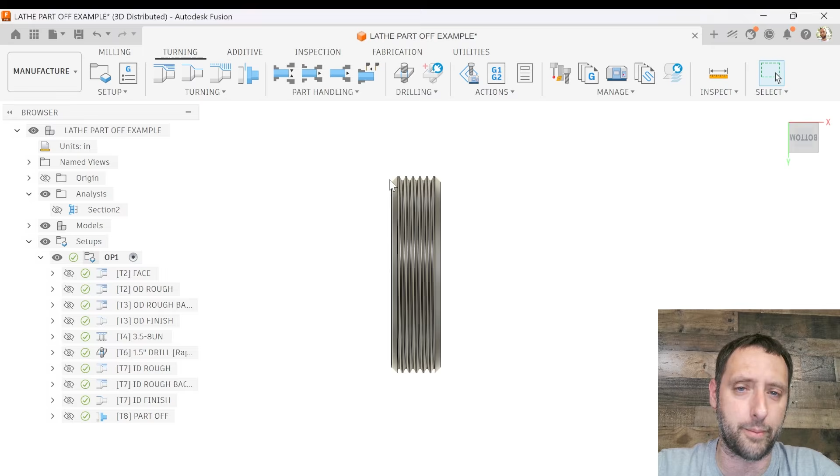All right, guys. So we are going to write a program for this part right here. We're going to create toolpaths. There's different ways to do this. This is going to be a part off in this example. So you're going to have a face, turn the OD. We're going to cut it straight. Then we're going to cut this little 45-degree right here.

Now I'm going to show you all both ways because this is going to be a part off job. But I'm also going to show you all how to actually part off with this 45-degree right here. It's really simple. It's literally a checkbox. In this case, because it's a thread, I wouldn't part it off right there because you could risk pushing a burr into the thread, and when you actually screw the part in, it could have a burr, right? So, but I'm going to show you all both ways to do it.

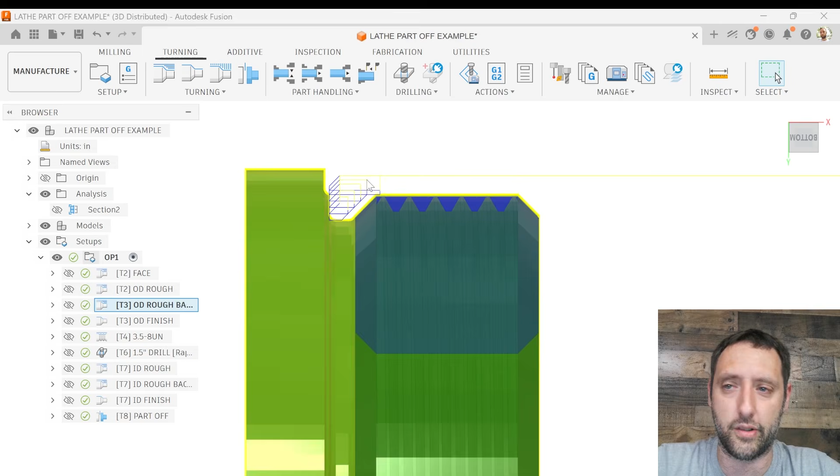So we're gonna chamfer it with a tool, and we're also going to chamfer it with part off too. I'll show you all that as well. So we're going to have a thread, we're going to drill it, and we're going to bore the ID. One tip I want to give y'all is anytime you're doing lathe parts, this section analysis, if you come over here to inspect section analysis, you could cut the actual part in half right here so you can see the inside, right?

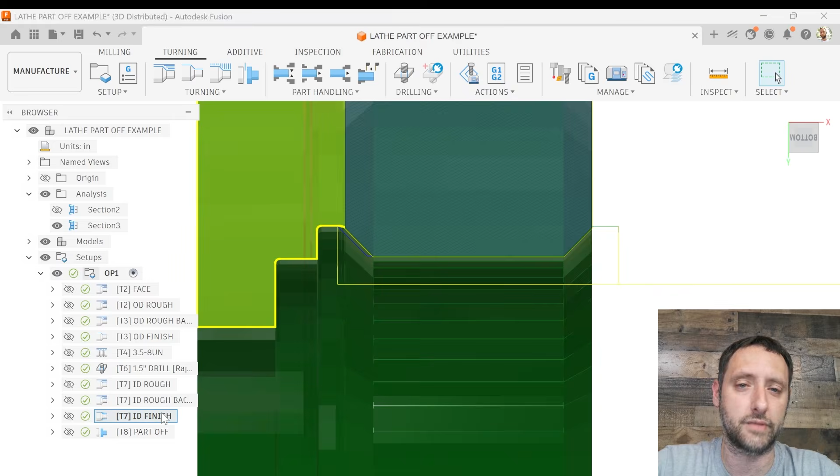But anyways, with that said, we're gonna rough the ID out, something that looks like that. We're gonna come in here, cut this little chamfer. We're gonna do an ID finish and then the actual part off right there.

All right, so the first thing we're gonna do is we are going to go create a setup. So I'm gonna click right here on the left side and go to setup, and we're gonna have a turning. And let's see, make sure your safe reference. We'll put that on WCS, offset 1.5 inches. I'm gonna go to my stock. My stock is we'll say 3.75, and we'll say we're 1.5 inch long.

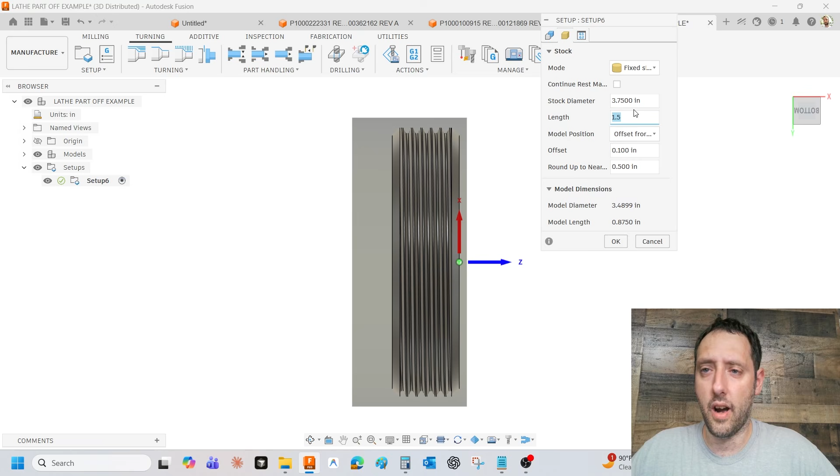Okay. Sometimes you can be running a big bar. Whatever your stock size is, go ahead and put it there. If it's going to be 24 inches, put 24. Right. So you have a big bar in your lathe, but this is kind of a large diameter, so you may not have a spindle bore that big. But anyways, that's what you would do. So I'm going to make this one 1.5. We're going to say we have one piece to make, and we have just enough material right here to chuck up on to actually come in here and cut this and part it off.

So I'm going to hit OK. I'm going to come over here, and I'm going to name this op 1. There isn't a second op, but we'll just name it op 1 just because. Okay, so the next thing we're going to do is we are going to create a facing operation. I like to use turning profile roughing, and the reason why is if you actually use a turning face, it doesn't output a G72 code, and I like the G72 canned cycle.

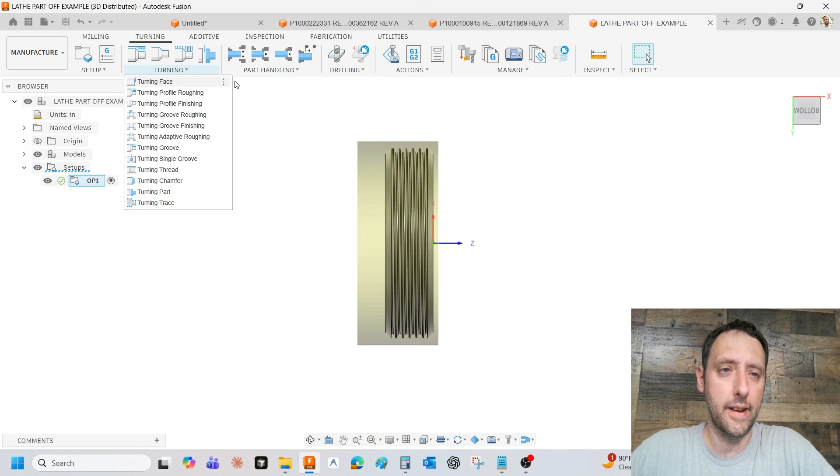So we're going to go ahead and click turning profile roughing, and we are going to select our tool. So I'm going to go over here, I'm going to add a tool. Now, I already have a tool in my tool library, but for this example, so you know how to make a tool, we're going to go ahead and make a tool real quick. So I'm going to go click on Turning General, and let's make this CNMG 432. My insert is going to be a CNMG 432.

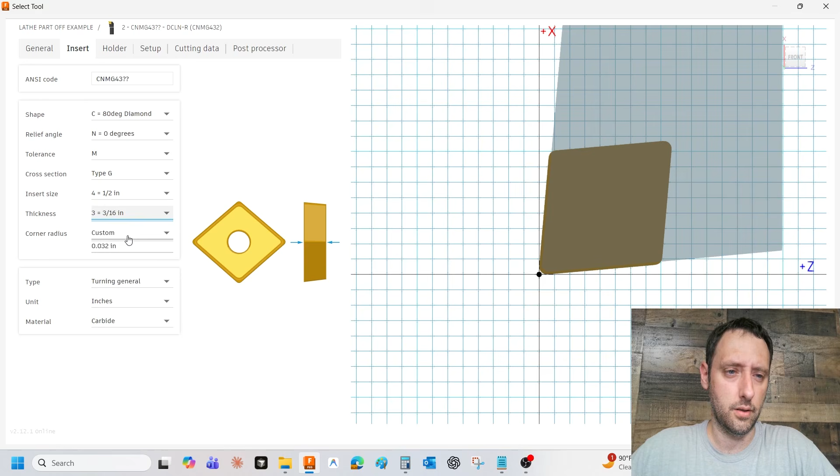Right? Cutting data. We're going to say this is 4140 heat treated. Let's go 650 RPM. I'm sorry, surface footage. And so our feed rate. Now we're not going to have a finish pass. We're just going to face it and be done with it, right? So let's go 0.010. I would normally go faster, but we want to have some kind of finish on there. I'm going to hit OK. I'm going to hit select. So I have my tool right here, my maximum RPM. Let's go 1250.

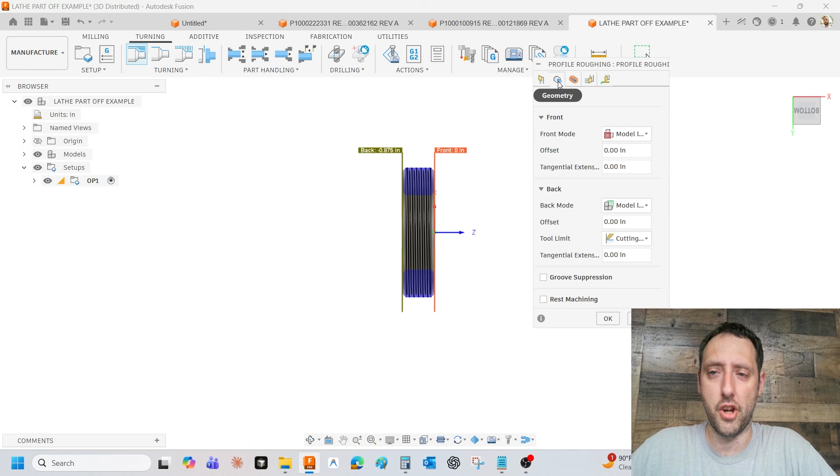All right, so on our geometry tab, my front is going to be stock front because that's where you want to start facing, is where the stock is. And your back is going to be on model front because that's where you're going to stop at when you get to the front of the model, right? So I'm going to go to radii, and let's do a stock OD, add 50 thousandths.

If your material is going to be running out, you can increase it, make it 0.1. You know, sometimes you may have a saw guy that cuts crooked parts and your part might be out. So sometimes it helps to offset that on the face a little bit. Anyways, outer radius, we're going to say stock OD, inner radius, stock ID, right?

So my cycle, we're going to put this on vertical passes. That's how we get our face. Okay. So we want to cut down, right? That's what a facing operation is. You want to check this box right here. Use canned cycle. That's going to output your G72, right?

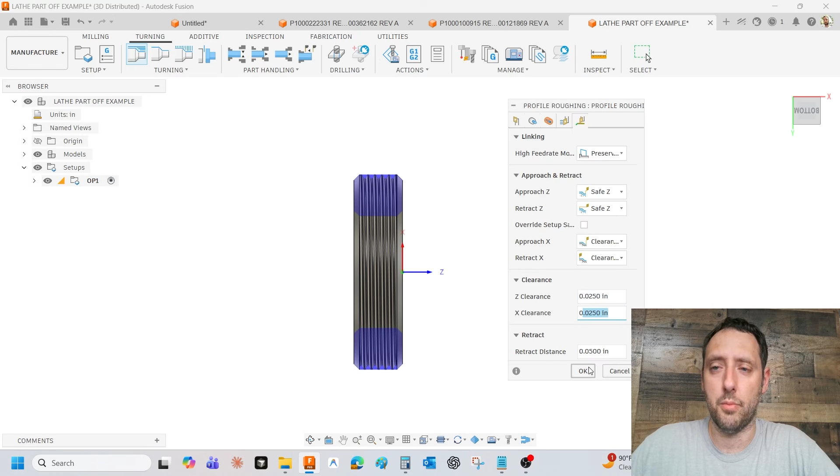Maximum depth of cut, I'm going to go 50 thousandths on this. And stock to leave. Now we're just going to cut it and be done with it, so we're going to go ahead and just leave no stock, no finish, just a face. And this is my linking tab. I use Safe Z. My approach X is clearance X, and I use a 25 thousandths clearance. Okay, so I'm gonna hit OK, and here's my face operation. So I'm gonna name this face.

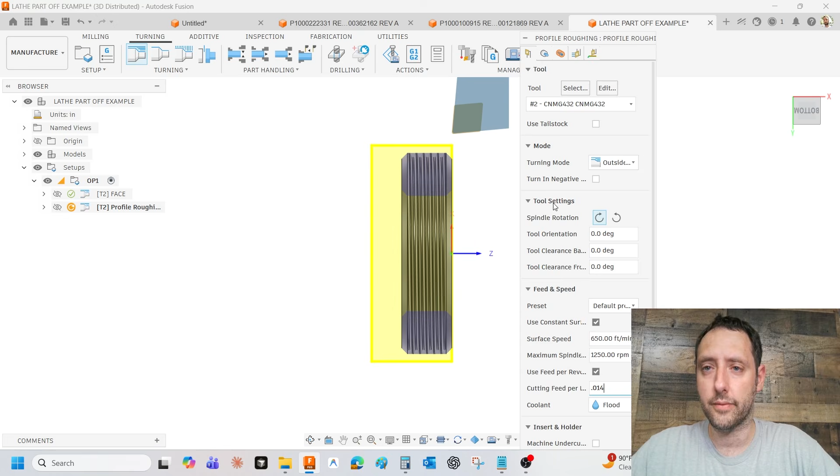Okay, so the next operation is going to be a turning roughing. So I'm going to go to turning profile roughing. I'm going to use the same tool. My maximum RPM is going to be 1250. And I am going to go 12 thousandths feed rate. You know what? Go faster. I'm going to go 14. How about that? Okay. So our front is going to be the model front.

This is the geometry tab, by the way. So front, I'm going to put it on model front. Our back, we're going to go model back. Now, this is where you have to figure out how you want to do this. What is the width of your part off tool? Okay. In this example, I'm going to use a 1/8 inch wide part off tool. So that is 0.125 inches, right?

So what I want to do is I want to turn back further than an 1/8 inch because I need clearance, right? So I'm going to go 150 thousandths. I'm going to go minus 0.15, right? So that gives me an extra 25 thousandths clearance. And I'm going to go radii. We'll just put this at 0.

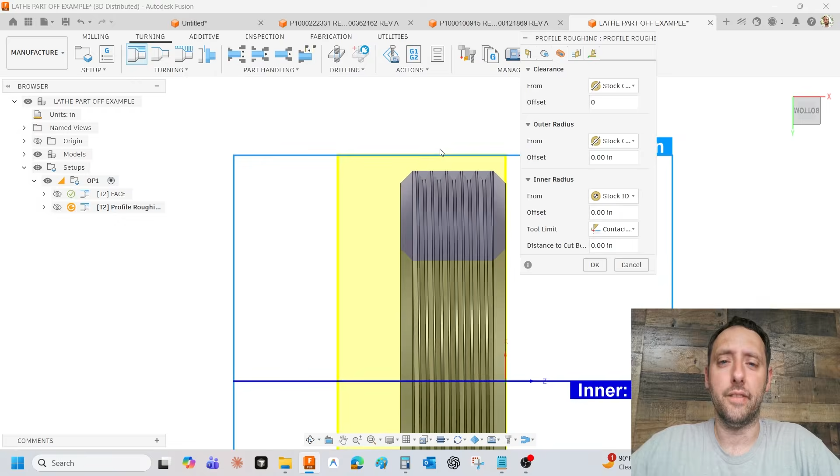So we're going to go stock diameter, and inner radius. You leave that stock ID, even though you're not actually cutting that far down. The software will stop the toolpath at the OD diameter. So that's a little tip. And this is great to know if you're going to be automating toolpaths or using templates. It speeds things up. You can have basically the same settings every time and just spit out toolpaths, and whatever the shape of the model is, it will make it correctly. Okay, so that is one thing to get used to, right?

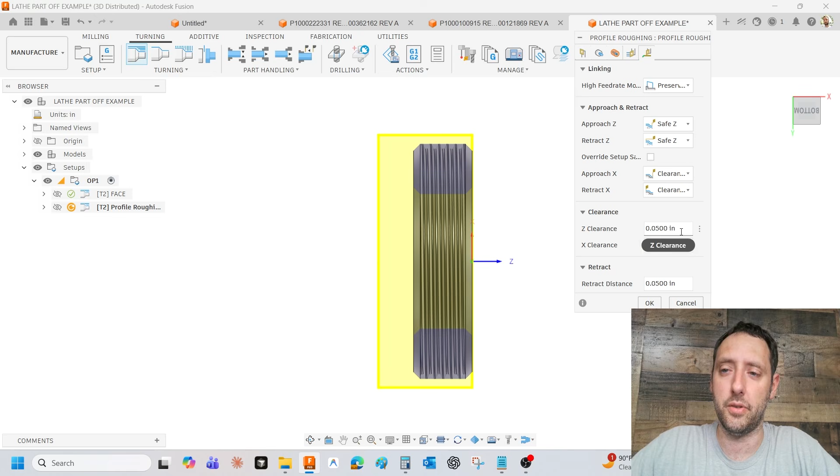So I'm gonna go to my passes tab. I'm gonna use horizontal. I'm not gonna allow grooving. We have this 45 degree right here, but we can't get that 45 with this tool. Okay, so we're gonna cut it straight. I'm going to save 10 thousandths X for finish and 2 thousandths on Z. And linking, we'll do safe Z, X we'll do clearance X. And clearance, I'm going to do 50 thousandths. All right, so I'm going to hit OK. And here's my toolpath right here.

So you have this 45. You could cut that with a 35 degree. I'm going to be honest, a lot of times I cut that with a 35 degree. Today, we're going to use a part off. So either way, whatever you want to do. But if you do this 45, you're going to use a 35 degree insert, and your front geometry is going to be on this edge, and your back geometry is going to be on this edge, plus a little bit of clearance. You got to be able to compensate for the radius of the insert.

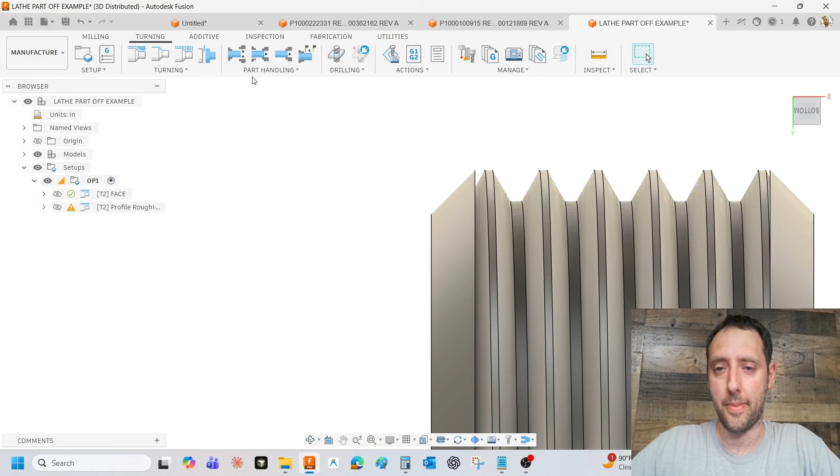Okay, so if you notice our OD rough toolpath, it has a warning. We're getting an X clearance trim at the clearance radius. Okay, so I'm gonna right click on it. I'm gonna edit. And we're going to go to the radii tab, and let's add 100 thousandths to the offset, right? So we're doing stock diameter, 100 thousandths. Now, look at the rapid moves right here. See how they're not straight across?

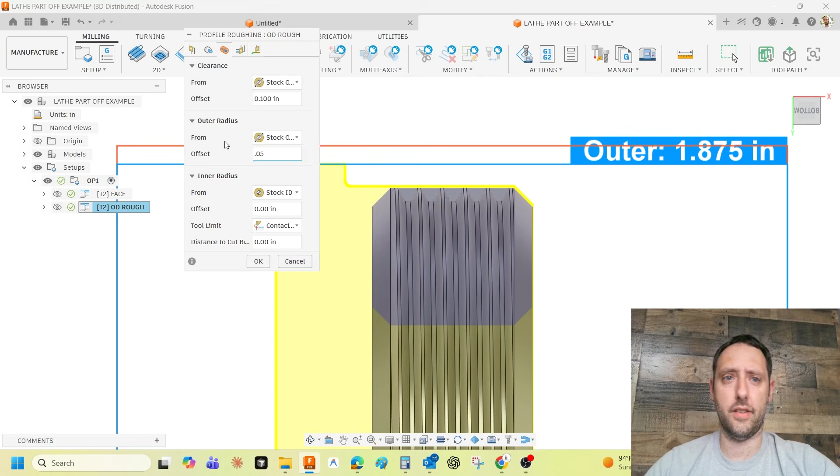Let's change that. Kind of weird. Let's go ahead and let's add 50 thousandths to the outer radius there. And that straightened up.

All right, so the next thing we're going to do is we are going to get this back chamfer right here, right? So what I'm going to do, this is what I like to do. I like to come over here, duplicate my OD rough, and we'll make this OD rough back. And we're going to edit, and I'm going to switch a tool. So we're going to go ahead and create a tool. Now, I already have a tool created, but we're going to make one so y'all can see the process.

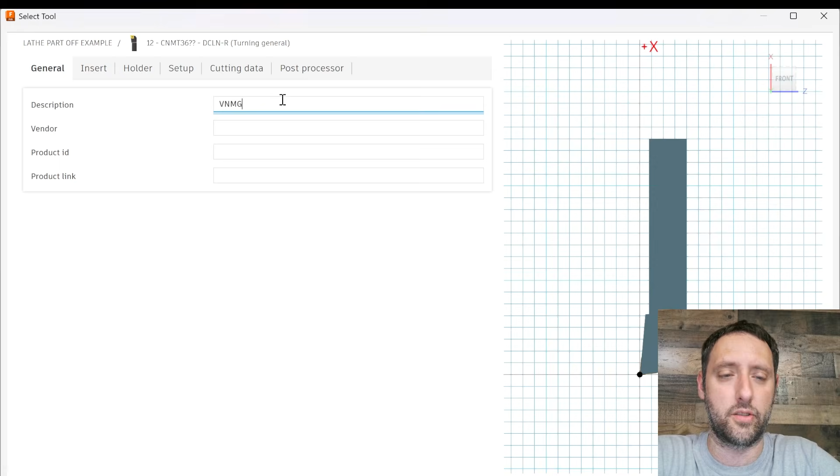So I'm going to go over here, go to plus sign, and I'm going to type in turning general. And we're going to make this a VNMG 332. My shape is going to be V. My relief N. Tolerance is going to be M. Cross section is going to be G. Insert size 3. Thickness 3. And my corner radius is going to be a 2. Right? So VNMG 332. Right?

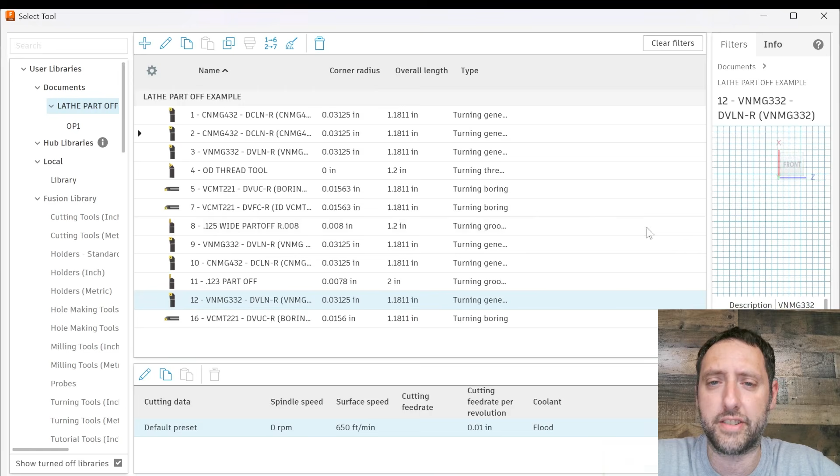Surface footage, make the surface footage 650, and we're just roughing, so 10 thousandths will be fine in this case. Now I would normally go faster, but go ahead and select it. The way we're using this tool to come in and get that back relief, 10 thousandths would be fine.

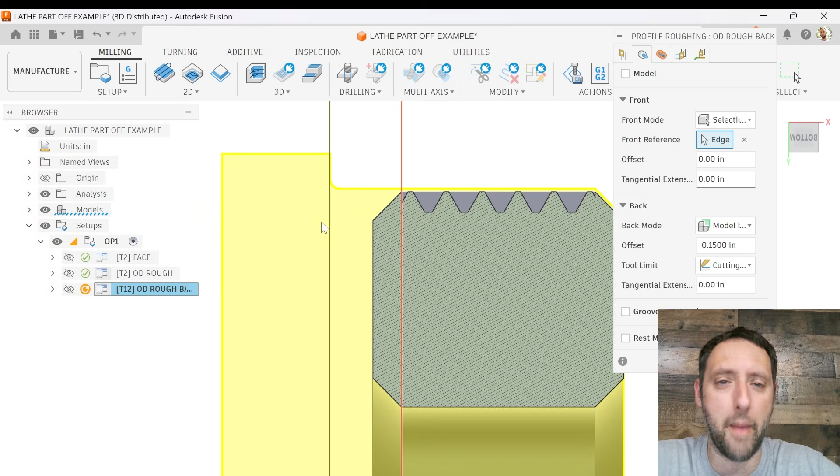All right, so my geometry. So what I'm gonna do is my front, I'm gonna put it on selection, and I'm gonna select this edge right here. The back, I'm gonna leave the same. And I'm gonna leave it just like this for a moment and show y'all how the toolpath would generate right now. Okay, so the clearance, we're gonna leave this how it is right now. It's not right, but I'm gonna show y'all why.

We're gonna jump over to the passes tab, grooving, allow radial grooving, and depth of cut's going to be 35,000. Okay. So I'm going to go ahead and hit OK. Now, you see how the tool is going way past the edge of this chamfer right here? We don't want to go down that far. And that is because we have it on undercut mode, but the radii is set down here to stock ID.

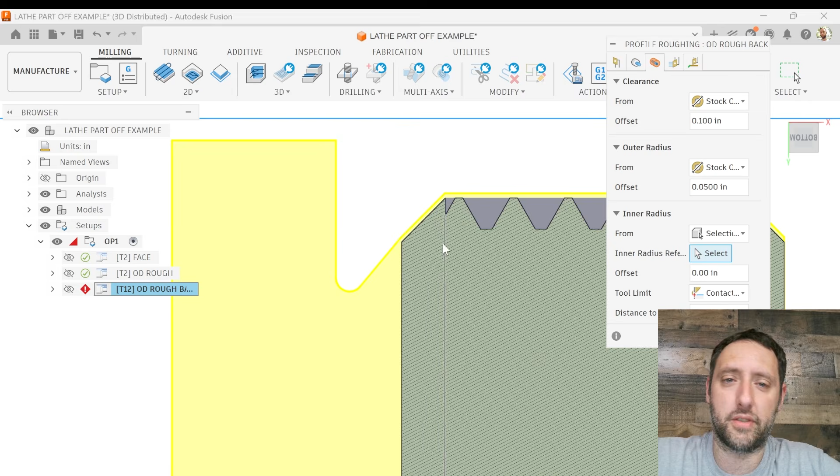So what I'm going to do is I'm going to put this on selection, and I'm going to select this edge right here. We're going to hit OK. Now notice the toolpath is the correct depth right there. And that's what you want to do.

Now, remember, how far back you go past the model is related to how wide your part off insert is going to be, okay? If you're using a 156, go 156 plus some, plus 10,000, 20,000. We're going to use an 1/8 inch part off, so we're going 150. So it's an extra 25, right? Anyways, that's the OD rough.

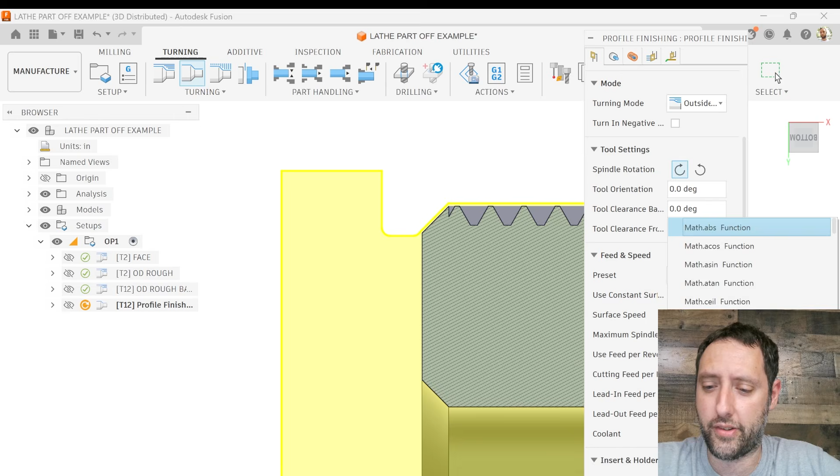Now I'm going to go and do the finish. So I'm going to select turning profile finishing, and we're going to use the same tool, so I don't have to change anything, except I'm going to change the feed rate. We'll make it 7 thousandths. All right.

So my geometry tab, I'm going to go model front. The front's going to be model front, and the back is going to be model back minus 0.15. Clearance radii. Let's see. Let's make it 0.1. That'll be fine right there.

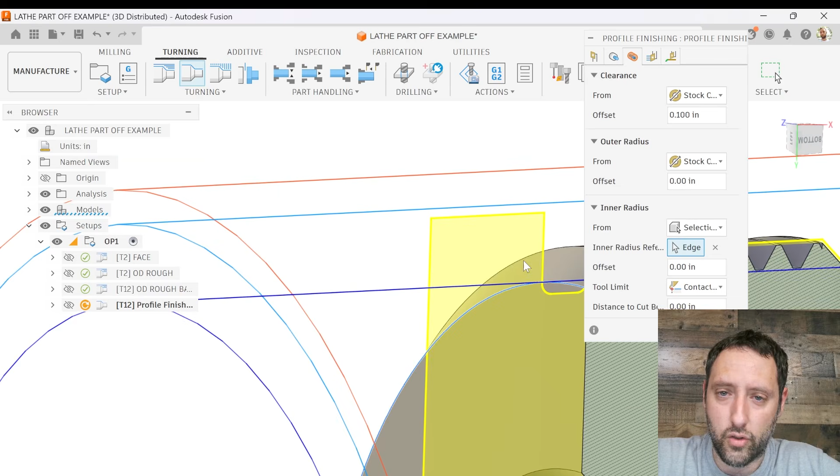Inner radius, I'll put this on selection, and I'm going to select this edge right here where the chamfer ends. All right. So on the passes tab, the only thing I'm going to change is allow radial grooving. So a lot of times you can get by with the bare minimum. You don't have to go and change every setting.

Really, what I would suggest if you're just learning Fusion, select your tool and the geometry that you're going to cut and hit OK. Just see what it does. Okay. A lot of times it'll give you a usable toolpath. So you kind of want to get the bare minimum.

And once you get used to the process, the workflow, there'll be times where you're like, well, I want the tool to actually come in and lead in straight and then come out. That's when you start actually going over the details of every input value. But anyways, let's hit OK, see what happens.

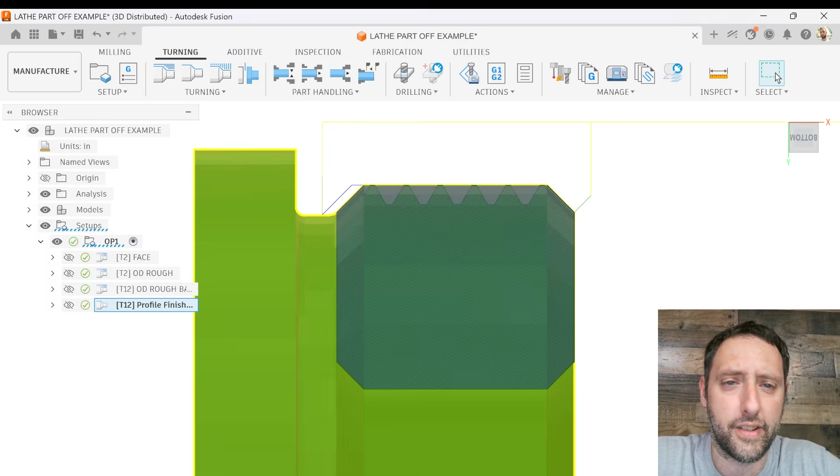That will work. Like this lead in right here. See how I was leading in at 45 degrees? Let's change that. So I'm going to edit. I have my use fixed lead in distance. I have that checked, right? And with that checked, the linear, let me open this so you can see it. The linear lead in angle, it's on 45. I'm going to put it at 0. Now notice when I put it at 0, the tool comes straight in, comes in and cuts.

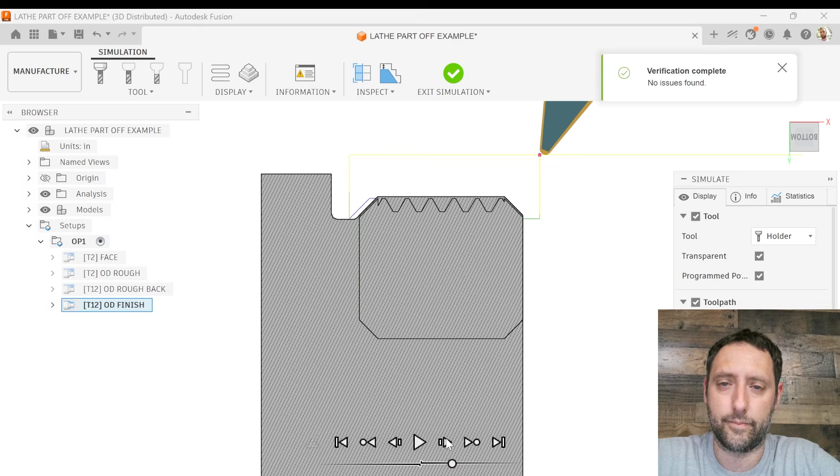So let's name this toolpath OD finish. And I'm going to go ahead and simulate it. The tool's going to come down, feed in, feed back. And you always want to make sure that tool is actually going back far enough right there. And we are. And if for some reason it's not, or you ever have trouble on chamfers or any kind of bevel, what you want to change is this tangential extension; it's usually the back you need to change it on. This right here, it's usually on bevels where you have the problem. You feed up and then you stop and you come out.

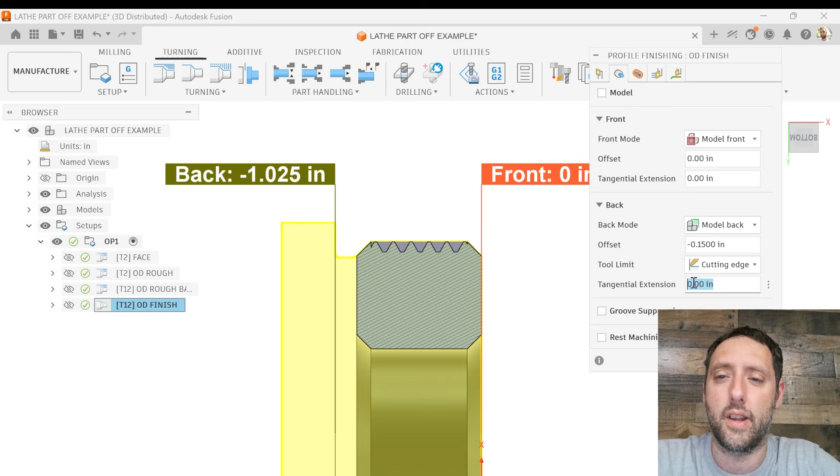What happens, basically when it compensates for the tool nose radius, the way the algorithm works, it doesn't always actually get everything. It'll leave like a burr or like a little bitty step, right? And what you want to do is add like an extra 10 thou. In this case, I'm not going to worry about it. I'm going to hit OK. So that's my OD finish.

Now, like I said earlier, it's a good idea to cut this back chamfer right here with a VNMG 35 degree insert. And the reason why is because if you part it off, you could push a burr on there. Now, for the sake of this exercise, I am going to show y'all how to cut it with the part off. Okay, so just ignore this little chamfer right here for the rest of the tutorial, because I'm going to show y'all both ways. We're going to have the part off tool come down, cut the chamfer.

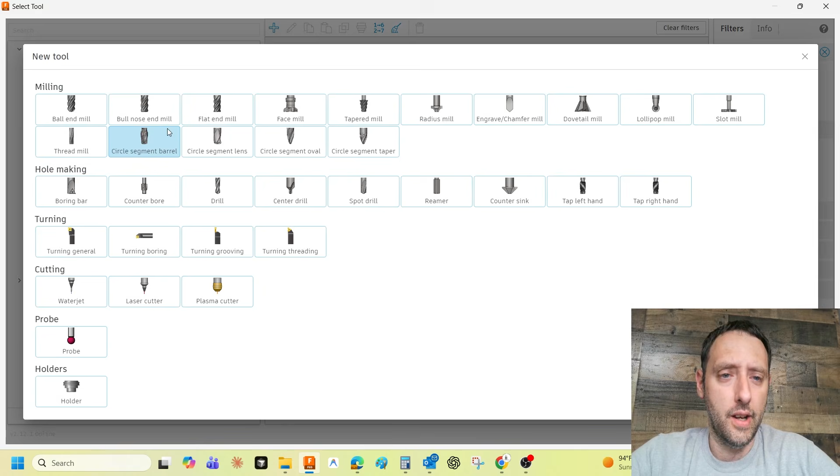Okay, so next thing we're going to do is we're going to cut an OD thread. So I'm going to go to turning thread. I'm going to go ahead and select the tool. Now I already have a tool made, but I am going to make one just for you guys. I'm going to go to turning threading as my tool type. There's a bunch of different types of threads. It can be a lay down, stand up.

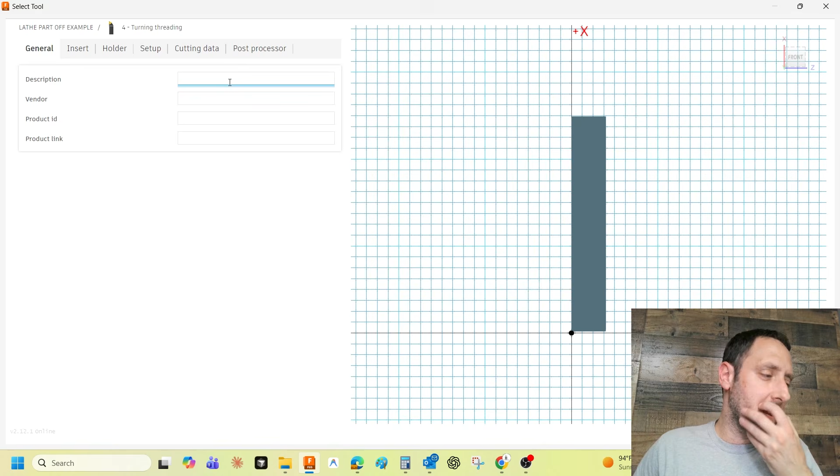I'm going to be honest. Your major, your minor, your depth of cut, and your feed rate is the only thing that really matters. Right? So we're not really going to worry too much about thread. A lot of that stuff can be figured out on the machine. It's not really going to affect the tool path too much over here. All right, so I'm just going to name this OD thread. Pretty simple. If you want to use a TNMA 43 stand up or a lay down insert, yeah, go ahead.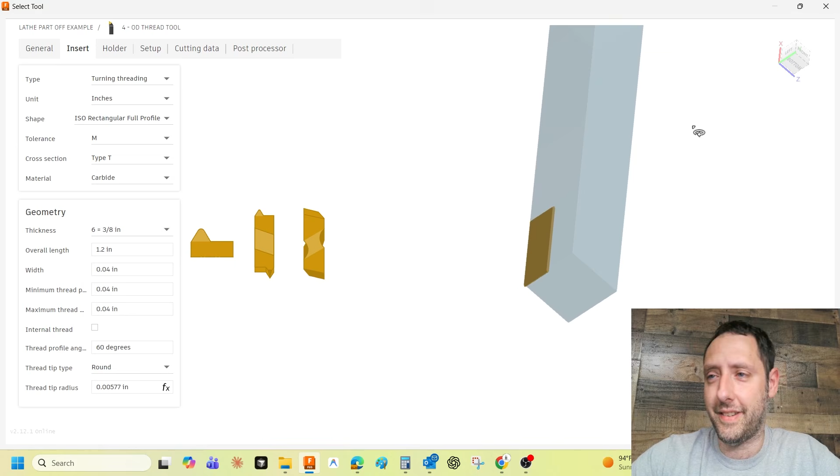Thickness. Normally you would actually just measure that. Let's see. We'll keep it at three. I'm gonna be honest, a lot of it doesn't really matter. But what you would want to do is you would have the tool geometry in front of you, the tool, measure it, and kind of fill out the parameters as you go. Now, a lot of this is for simulation purposes. It's not really going to affect the G code too much. So in that case, we're not going to really worry about it.

But let's see, your width. Your width does matter. So it's got to be larger than the actual lead, right? So we are going to do a 3.5 inch 8 OD thread, right? So 3.5 inch 8. So the lead is going to be 0.125. So our width is going to be greater than that. So we'll say it's 0.1875.

Minimum thread, we'll put 0.014. Maximum thread, 0.1875. Yes, you're not actually going to use that, but we're just going to put that number because if you don't get this number correlated with the width, it'll error on you. And just to keep things simple, just make these two values the same unless you have the tool in front of you.

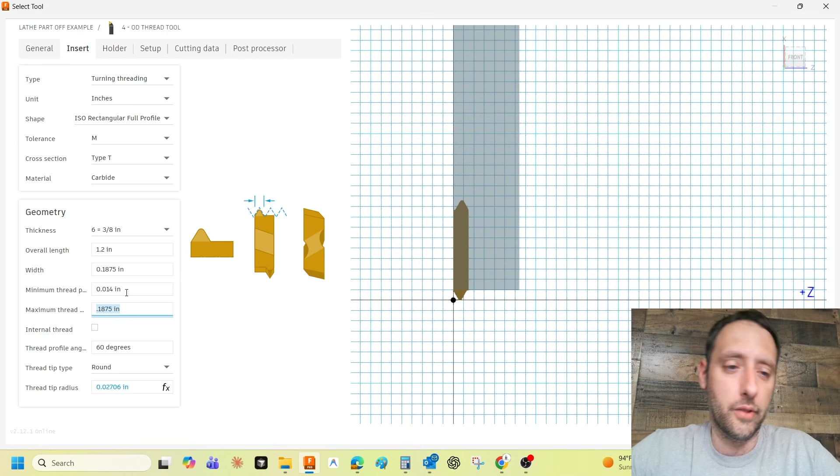Cutting data, spindle speed, we'll go 350. And tool number, we're going to let it just do default. So I'm going to hit OK. I'm going to select this tool. All right. So what I'm going to do now is I'm going to go to the geometry tab. The front. So the first thing we're going to do is we're going to click here on thread face, and I'm going to select top of that major diameter, right?

Thread pitch, 0.125. Thread depth is going to be, thread height is 67 and 7/10 thousandths, right? I find it gives more accurate numbers if you round up and go up to 3 or 4 thousandths larger than the actual thread height. So 67 thousandths, let's just put 0.07.

I also like to keep it a whole number. The reason why I like to keep it a whole number is when you go to your passes tab, it's easier to get an even depth of cut, or you can get a whole number. But anyways, okay, so confinement.

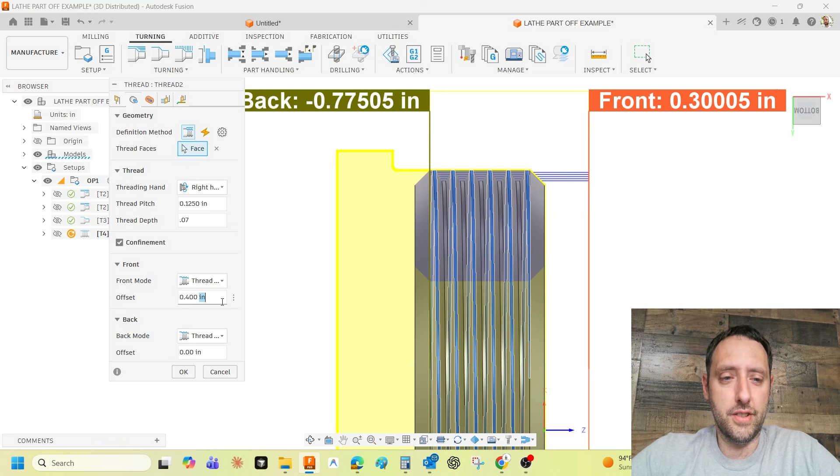So the front, we have an 1/8 inch lead. So let's just make the front offset 0.125. Okay, so notice it's not actually 0.125 to the face of the part. It's actually 0.125 to the face of where the thread actually starts. So it's adding the distance to the chamfer. I really don't want that.

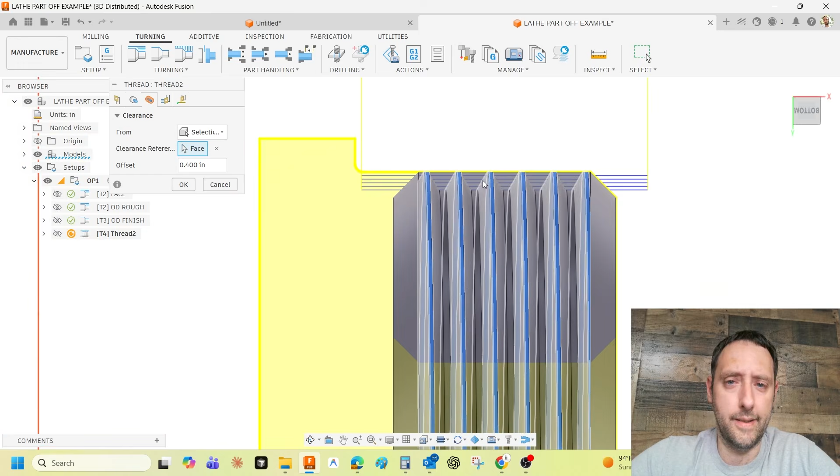So what I'm going to do is put it in origin absolute and then have it at an 1/8 inch. And I'll also do the same thing on the back. I'm going to go to model back and go minus 0.125. Radii, I'm going to put it on selection. I'm going to select this major diameter right here, and I'm going to add 50 thousandths to it.

Okay, passes tab. So remember, our thread height from this thread was 70 thousandths. All right, so say that I'm going to go 4 thousandths increments, right? So the step downs is per side. So if I go 4 thousandths, that's 2 thousandths per side. So 70 thousandths, which is thread height, divided by 0.002 is 35, right? So my number of step downs, I'm going to put at 35.

And when I hit tab, notice my first pass right here comes out as 0.002. So basically, it's going to be in increments of 0.002 for each pass per side. So that's 4 thousandths on diameter. Linking, whatever default you have there will most likely work. So I'm gonna hit OK. And let's name that thread toolpath. So I'm gonna name it 3.5-8 UN. And we're gonna hit save.

All right, guys. So the next thing we're gonna do is drill this part. Now, if you look, the ID is 2 inches. I'm gonna say that I have a 1.5-inch drill. Now, it would be faster to drill something bigger, but for the sake of this exercise, I'm gonna have a roughing bore, an undercut bore, and a finish. So we're gonna have 3 actual toolpaths here. So with that said, I am going to make the drill smaller, so I have a reason to give you all an example for roughing bore.

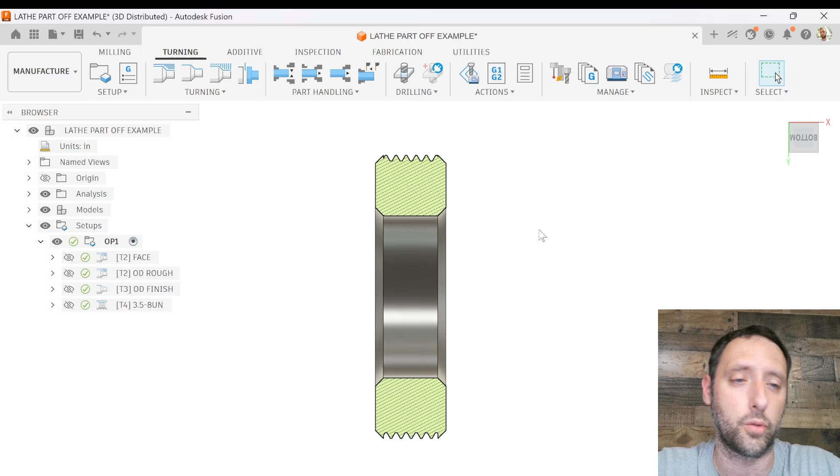So what I'm gonna do is go over here to drilling, and I'm gonna go select, and I am gonna create a drill. So I'm gonna go drill here, and this is gonna be an inserted drill. So I'm gonna say it's a 1.5 inch inserted drill. So it's gonna be 180 degrees, right? So I'm gonna make the diameter 1.5 inch and the tip angle 180. Very important. And a lot of this we can leave default.

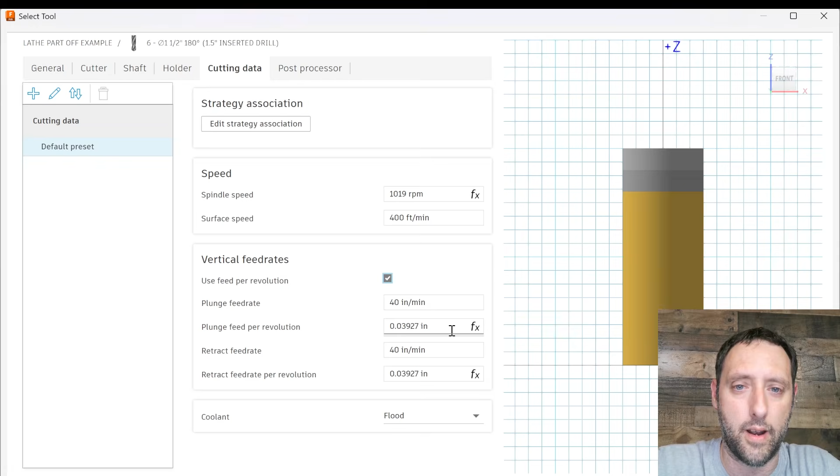I'm gonna jump over to the cutting data tab, surface footage. Let's go 400. And we're going to check this box right here, use feed per revolution. And my feed per revolution is going to be 3 thousandths. Post processor, we'll make it tool number 6 here. I'm going to select. I'm going to go to my geometry tab and face. I'm going to select this face right here. Then I'm going to jump over to the height tab.

Now notice I'm not checking every detail in here. Once you get familiar with Fusion, you'll kind of get to know what needs to be changed and what doesn't. A lot of times you just need a basic toolpath. You can kind of go in there and give it a depth, give it a tool, tell it what geometry, and bam, you have a toolpath. Now, when you start wanting to get very specific on how the tool is going to come in there, that's when all the other input boxes come in.

But anyways, let's see. My clearance height is going to be 1.5 inches. My retract height is going to be 0.1. Feed height, 0.1. My top height is going to be 0. And my bottom height, I'm going to say hole bottom minus 0.25. Actually, let's make it minus 0.3.

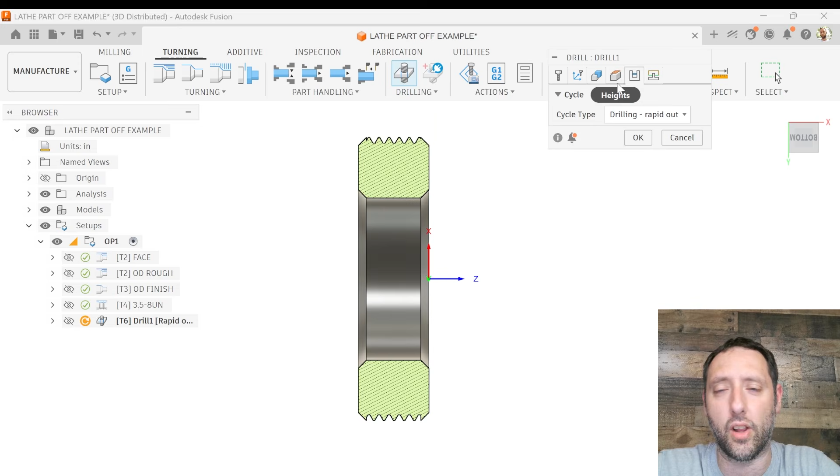Now, a lot of times, depending on what your stock is, you may just want to drill through. Actually, let's just do stock bottom. Okay. We're going to part it off, but what I'm going to do is stock bottom minus 0.1. What that'll do is give your boring bar chip evacuation, right? So you can stick a bar in there, and you're not going to worry about shavings building up.

Now it's a 1.5 inch hole. You should have room, but good practice. Anyways, the rest of this is fine. I'm just going to hit OK, and I'm going to name this toolpath 1.5 inch drill. Save it.

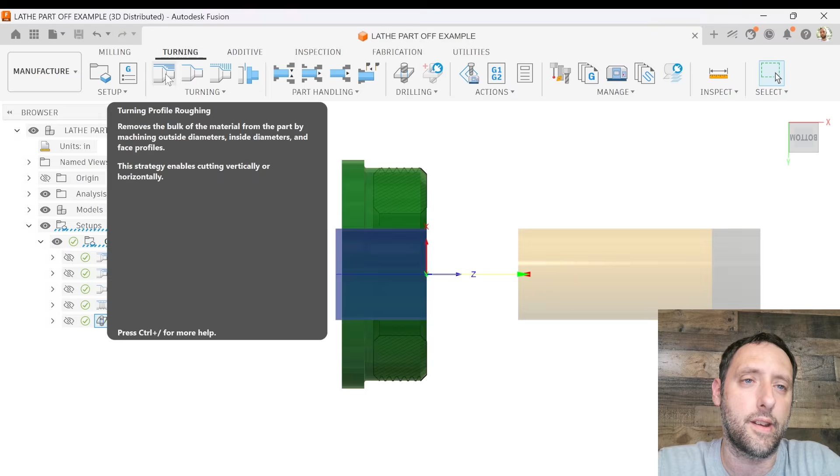All right, so the next thing we're going to do is create a boring bar, right? So I'm going to go over here to turning profile roughing. I'm going to select a tool. Now, I already have a tool, but I'm going to make one so y'all can see the process. So I'm going to hit this plus sign and go to turning boring. This is going to be, let's say, an ID VCMT 221, 3-degree lead. I need a 3-degree lead to get underneath that 45. I'll show you what I'm talking about.

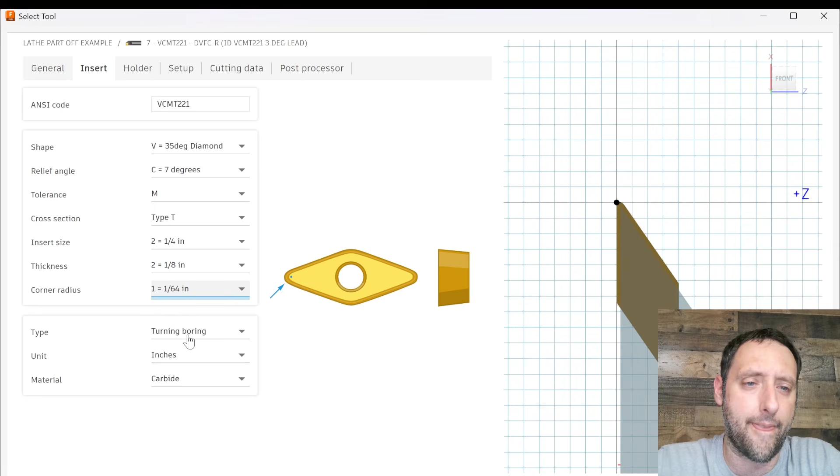So I'm going to go to insert. My shape is going to be V. My relief is going to be C. So VCMT. Insert size is 221, so thickness is also going to be 2. Corner radius is going to be a 1. All right, so VCMT 221. Go to the holder. Now it shows a triangle insert right there. I don't know why it's doing that, that's Fusion.

Welcome to Fusion 360. What you want to pay attention to is this graph of your tool. You can zoom in, you can pan out, you can actually rotate this too. So when you make changes in here, you need to make sure you can verify that it's actually right, because you can easily make it out of proportion, and you'll see what I'm talking about once you start changing this stuff. But anyways, cutting width. I'm gonna make this 0.6.

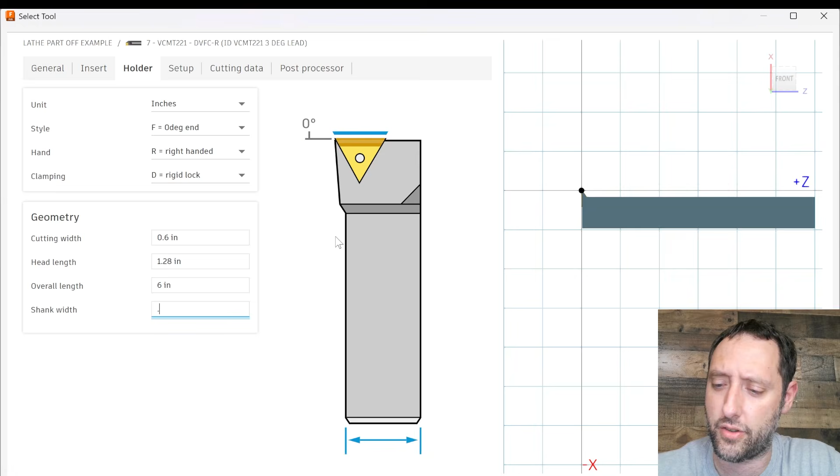My head length. One thing, I don't actually have the tool with me. So really, what you want to do is get the tool, measure it, and then actually add these attributes to it. Anyways, head length, we'll leave it at 1.28 right now. Overall length 6 inches. Shank, let's make it a 5/8. Try this out. Rotate it, see what it looks like. All right. Let's see what we got here.

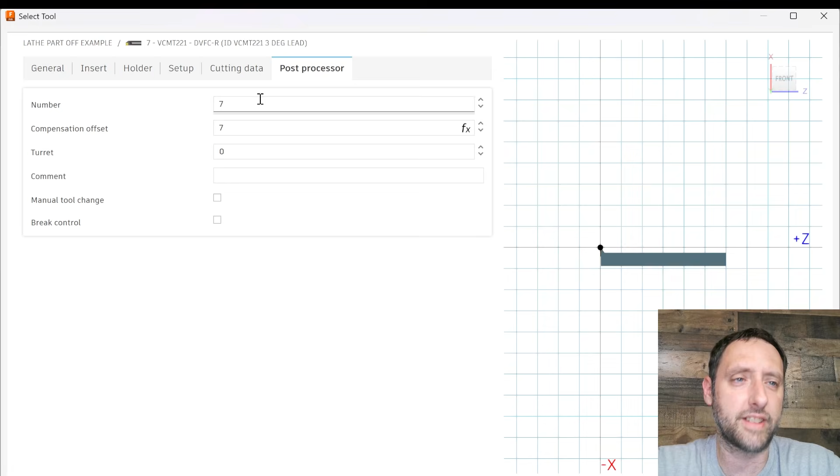Okay, cutting data. Go to 650 surface footage. It's a small boring bar, so I'm just going to go 0.008 feed rate. Depth of cut, we're going to do 0.05, so 50 thousandths of an inch. Post processor, we're going to use the next number up, which is number 7. So I'm going to hit OK, and hit select. Let's see, maximum spindle, we'll go ahead and bump this up to 1250.

Geometry. So my front is going to be model front. My back, we're going to go model back, minus 0.25. We're going to go a little further back, right? We'll try a quarter inch. We want to make sure we give ourselves room. We're basically going to have the bar go up in here and cut this undercut, right? So we want to get that chamfer in there. All right, so minus 0.25. We'll give that a shot.

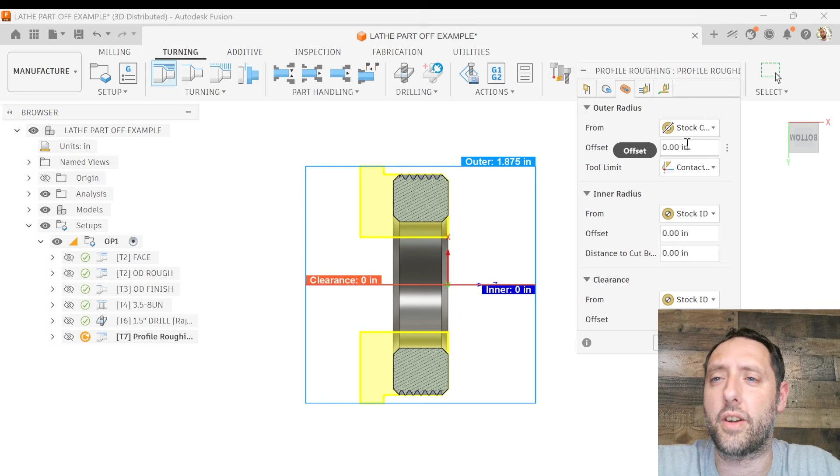Outer radius. Let's leave it on stock OD there and see what that does. Now I'm gonna be honest. What I usually do is come over here. Oops. My outer radius, actually select this. Now, really, I use a template. So what you want to do is really set this up using a template, and then you can just spit out programs.

And we'll make another video on it. So I don't usually go through every one of these details. Really, you want to get where you can write a program in like 5 minutes, and that can be done with templates. Once you get used to working with templates and you have a template for most common shapes and sizes, it's pretty quick, right? So forgive me if I'm a little rusty on some stuff, because usually I like to write programs fast, and going detail by detail and recreating tools is not exactly the fastest way to do it.

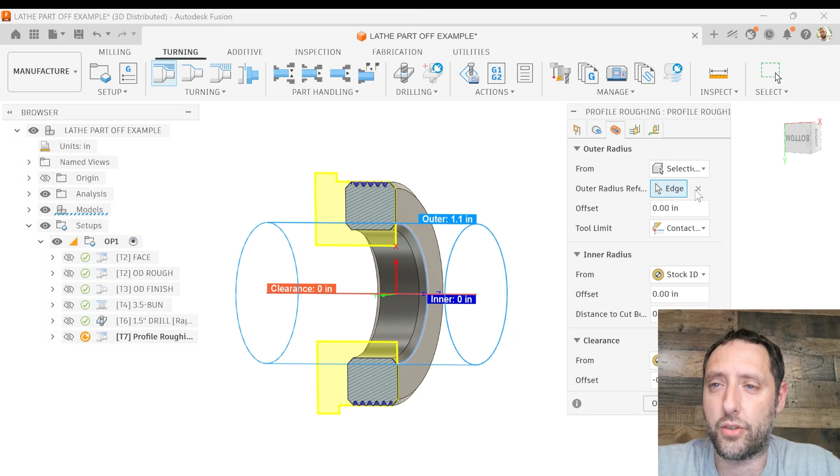But anyways, with that said, my outer radius is this diameter where that chamfer is. My inner radius is going to be, select right here. And my clearance, I'm going to also select this ID, but go minus 0.1. All right. Grooving, I'm not going to allow grooving yet. I'm going to check use canned cycles, and make sure this is right. So stock to leave, I'm going to leave 10 thousandths on the X and 2 on the Z.

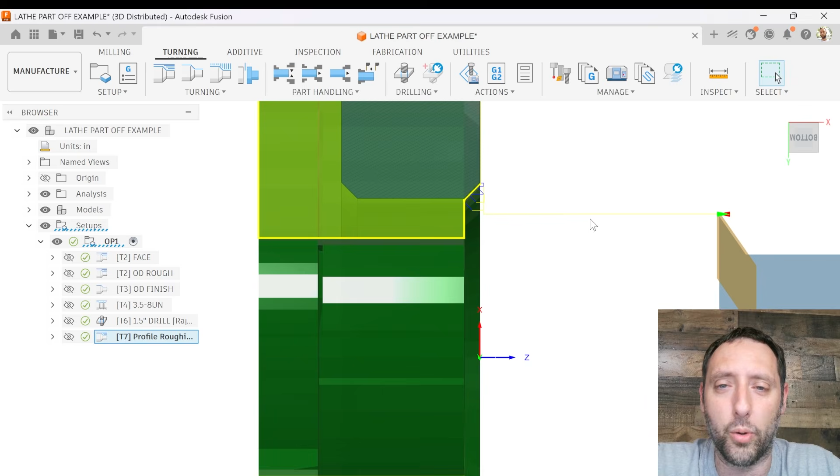And let's just go ahead and hit OK. I think that's good right there. All right. So notice that I didn't get a toolpath. Okay, I kind of knew that was going to happen. I want y'all to walk through the process because boring bars, any kind of ID work like this on a lathe, it'll drive you crazy, because if you don't have your settings for your clearance right, you're gonna have problems. So we're gonna go over here to your radii.

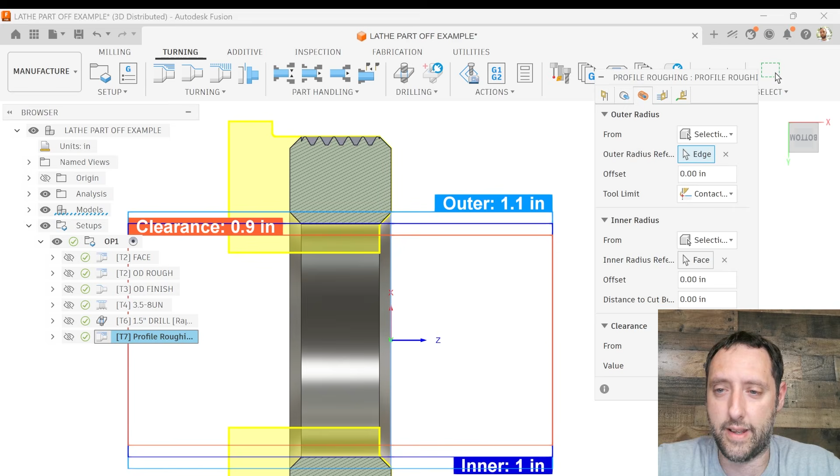So we go to the radii, and what we're gonna do is your clearance right here. Now remember, we drilled it with a 1.5 inch hole, right? So we want our clearance to be less than 1.5 inches. So I'm gonna go to diameter, and we're gonna go 1.4, right? So I hit OK. Still don't have a toolpath, right?

So what I'm gonna do is I'm gonna edit. I'm gonna go to this radii right here, and remember we selected this diameter right here, right? Let's go minus 0.1. See what that does. All right, so here's your toolpath right here. Now, let's do that. So check this out, let me rerun that. All right, so let me check this out.

Okay, so check this out. So this isn't right, and I want y'all to see why. So I'm gonna right click right here. I'm gonna go simulate. Now watch the tool. So this tool's right here. Comes up. Look at that. Look at that path right there. It is taking more than 50 thousandths. I mean, sometimes you're gonna want a heavy path. And notice it didn't get the material right there either.

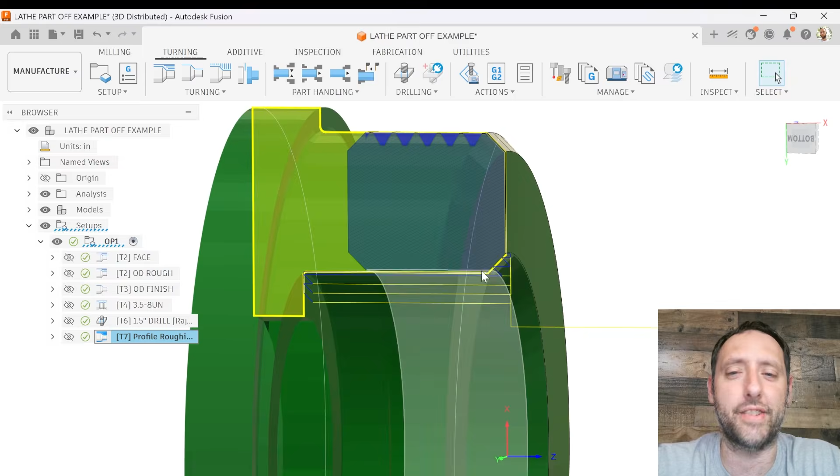Right? So check this out. So what we're gonna do is we're gonna change the radii. Instead of that outer edge, we're gonna put this on stock OD. Now we're not actually cutting the stock OD, but notice it now gets that chamfer right there. Okay. Now I'm gonna be honest, I don't know why it didn't actually cut that chamfer. It should have cut that chamfer, but it didn't. And that's why it's a good idea to have your outer radius just leave it on stock OD.

Because what you want to do is once you get your toolpath articulated to the way you want it, you want it saved as a template. And then you just pull up that template every time. You don't have to do all this work of entering all this input data. Really, all you do is use your template. Depending on the material, you may change speeds or feeds. You change your geometry, your starting, front, back, and the radii. You won't even have to change because it's outer radius, right? So the outer radius is on stock OD.

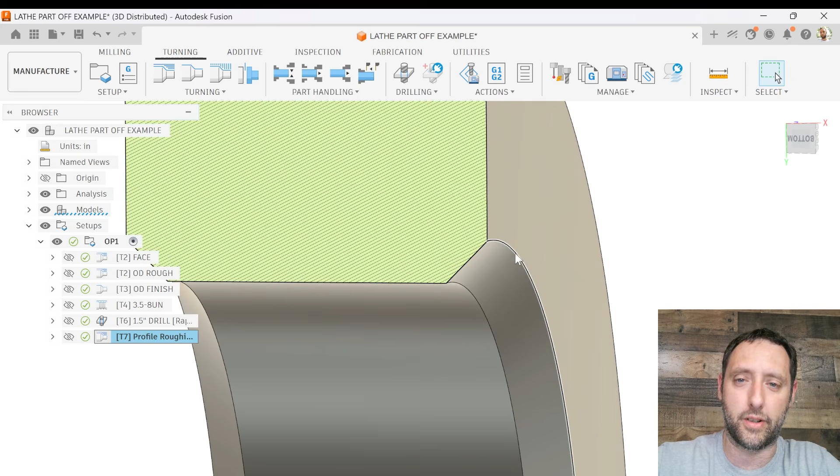Now the bar is not gonna cut the stock OD. Basically, what it's gonna do is scan all the geometry up to the stock OD, and it's gonna cut up to the geometry. Okay, it's not actually cutting to the stock OD. So the largest diameter in that feature set is this diameter right here, where this chamfer is. Right? It's not gonna cut all the way up to the stock OD. Let's see. It still looks like it's taking a lot of material right there.

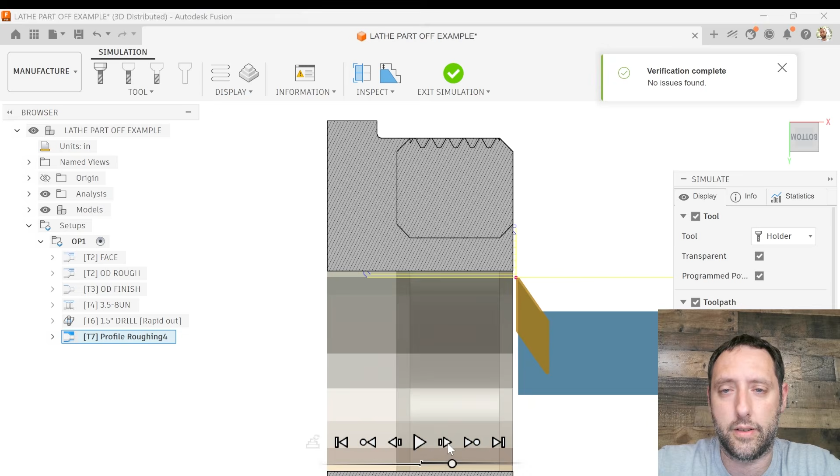So what we're gonna do is we're gonna edit. I'm gonna go to my radii right here. Let's put this diameter at 1.5. So I'm gonna hit OK. Now notice my passes right here. So I'm gonna simulate, click, and voila! Nice even passes, right?

But anyways, what you want to do is you want to have your radii on diameter. And notice on the inner radius, what I did is I put in 1.5 inches. That's where the drill left. So that's where the material to be removed starts, at 1.5 inch.

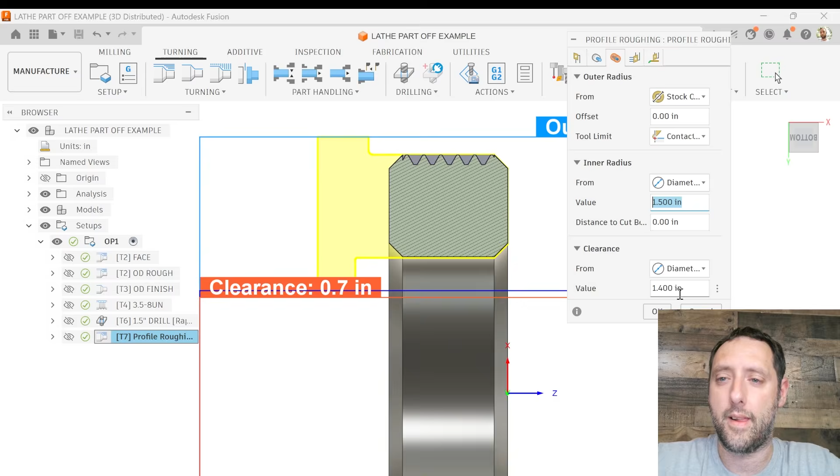Clearance is just under that, right? Because the boring bars will come in. When it backs up for clearance, it's going 100 thousandths below and coming out. But anyways, so I'm going to name this ID rough. So this is the first roughing.

So the next thing we're going to do is we are going to rough out this little chamfer in the back, right? I'm going to use the same tool. So what I'm going to do is I'm going to select this ID rough, and I'm going to hit Control D for duplicate. And we're going to rename this ID rough back.

I'm going to right click, I'm going to edit, and we're going to change the geometry. So the front, I'm going to put it on selection. I'm going to zoom in. I'm going to select this edge right here, right? And the back, I'm going to put it on model back, and we're going to offset it. Let's start off at 100 thousandths. We'll see what that looks like.

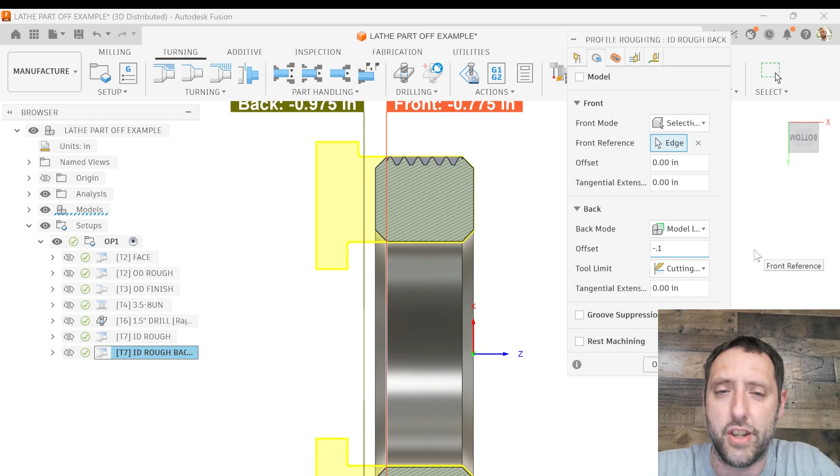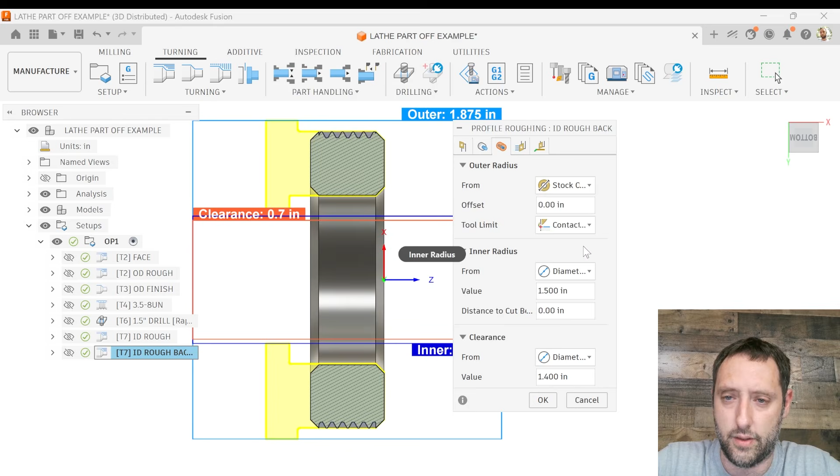This may vary. Sorry, gotta move this. So this may vary. We'll see what it looks like. Radii. So outer radius, we're going to put on stock OD. Inner radius, we'll put it on selection. I'm going to select this ID that we already roughed out. We'll have it on minus 0.1 clearance. I'm going to put it on selection, and we'll also keep it at minus 100 thousandths.

Now, the depth of cut, I'm going to put at 0.035. And grooving, I'm going to put on allow radial and axial. Now, notice I still have my stock to leave. All right. So I'm leaving the same amount of stock that I did on the original ID rough. And we're going to hit OK. All right. So this is how it came out.

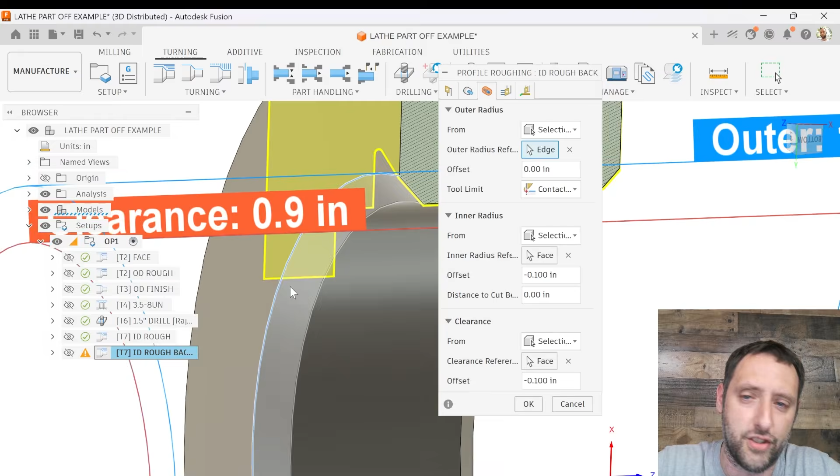Now, one thing you could do is you go to edit on the radii right here. Instead of your stock OD right here, I'm going to put it on selection, and I'm going to select that actual edge right here. All right, so let's hit OK. Now, I got a better result doing that.

That's because I limited how far up the tool could go, because I originally had it on stock OD. Now, usually that isn't a problem, but in this scenario, it actually is. That's because what we do is undercut. We want to kind of control or limit how far up it could go, right? So this is good right here.

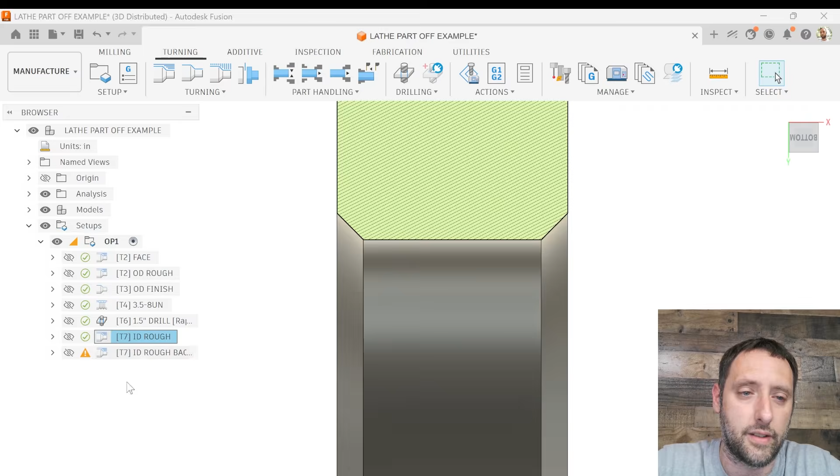Now, notice my original ID rough. We're going back minus 0.25. This one, we are going back not as far. Now, I didn't have to actually go back minus 0.25. It might be a little excessive, but I wanted to make sure I had enough room in there, right? But anyways, so that's my ID rough.

So what I'm going to do now is I'm going to do a finish. So I'm going to go to Turning Profile Finishing. And let's see, my maximum spindle speed will go 1250. Geometry, I'm going to do model front. Back, I'm going to put on model back, and I'm going to offset it back minus 0.1, so 100 thousandths more.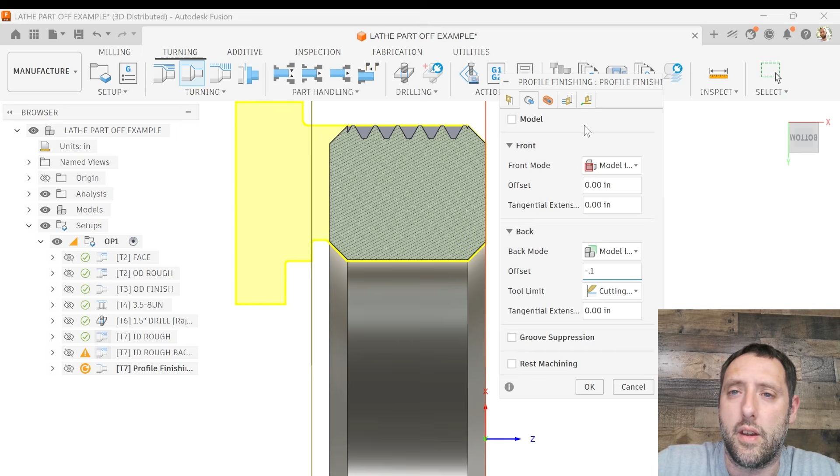And on the radii, I'm going to do the same, my selection. I'm going to select the back chamfer right here; both these chamfers are the same size, the front and the back. So stock inner radius, I'm going to put it on selection, and we'll go minus 0.1. Clearance, put it on selection, minus 0.1. Now, there's different ways to approach the radii tab, okay? But this will work right here. Now, I'm going to go ahead and hit OK.

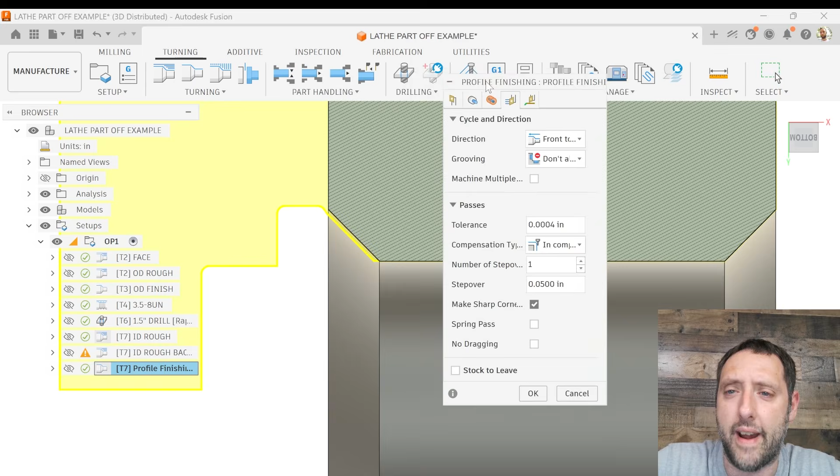And notice that it didn't go up and cut that back chamfer. That's because I forgot to put the passes tab on allow radial grooving. Alright. Now that's correct. But look at this lead in right here. See how it leads in 45 degrees? That's on my linking tab right here. I have use fixed lead in, but I have it set at 45, so I'm gonna put that at 0. This is just my preference. You don't have to do it this way.

Let's go ahead and simulate this. Looks good. That's what we want. All right, so I'm going to name this ID finish. Now, notice I have a warning right here. So let's look at this warning. So X clearance trim at the clearance radius. So let's check that out.

The radii tab. Now, I'm going to be honest, this really ain't going to affect the toolpath, but we'll just fix it. Now notice, so I dropped down the clearance and the ID. Now the only problem is cutting air right there. Right? I don't like that at all. Let's change that back. There we go. Still cutting air.

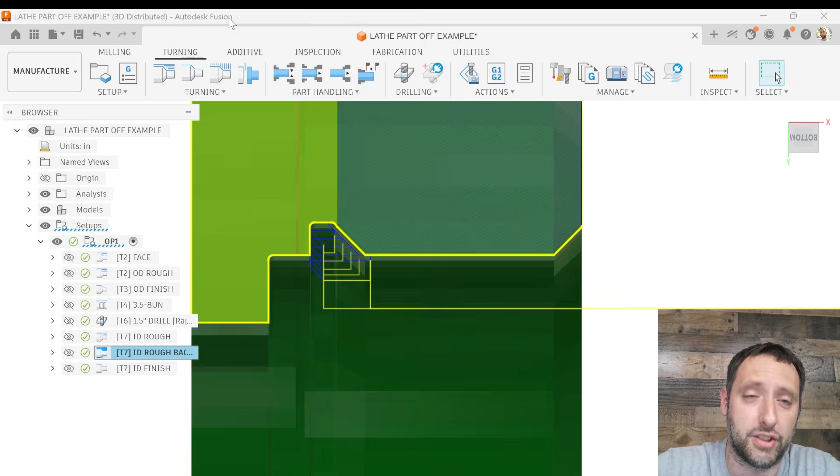We'll offset it 25 thousandths. All right. Tool comes up, comes in. All right. So we're not cutting air. That'll work right there.

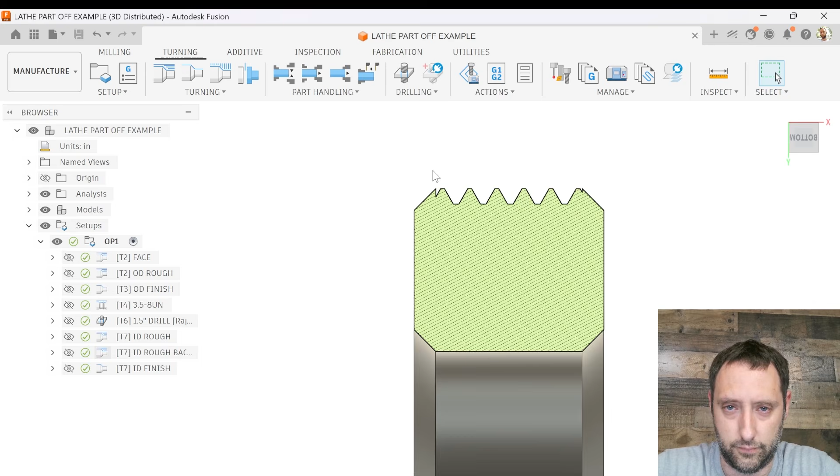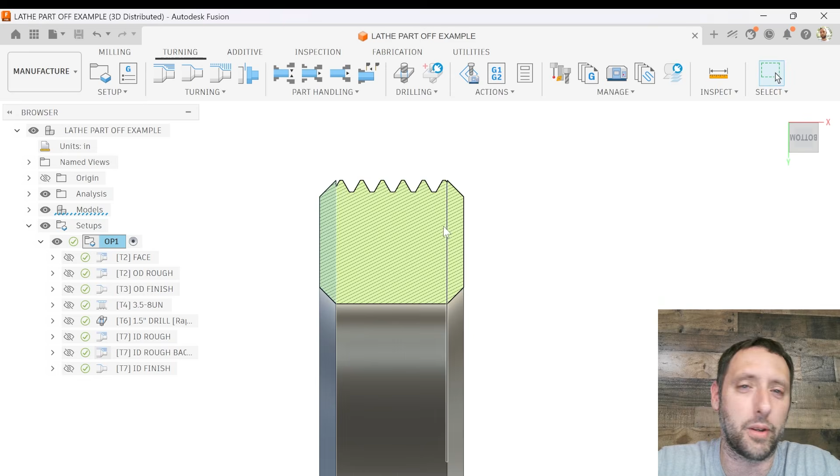All right. We're gonna hit save. Okay. So the next toolpath is we're gonna part it off. Now, when we part it off, we're also going to add this chamfer, right? Okay, so the next thing we're going to do is we are going to part it off, and we're going to also part off this 0.100 45 degree right here. That's 0.100. So you need to know, if you want to cut it at an angle, you need to know the size. All right. But anyways, you should, because you drew the part up to print, so you will have that. But just so you know.

So, anyways, I'm gonna go to turning. I'm gonna go to turning part. And we're going to select a tool. Now, I already have a tool created, but like I said before in the other toolpaths, let's go ahead and make one so y'all know. So I hit the little plus sign right here. If that's not blue, select a document or select something that will allow you to add a tool. Notice if I click local, this is grayed out. It won't let me add a tool right there directly. I can add it to the library here. But anyways, in this case, I am going to do it in the actual part file.

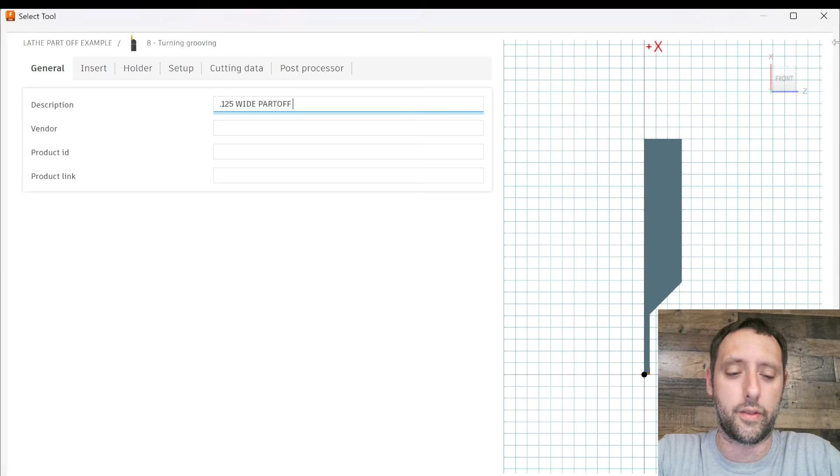So I'm going to hit the plus sign, and we're going to use a turning grooving, because that's what a part off tool is. It's basically a grooving tool. And let's make this a 0.125 wide part off with a point radius of, say, 0.008. So it's 0.125. Now, it helps to actually have the tool in front of you, so I'm going to be kind of guessing. Now, you want your tool to be long enough to actually part it off. That 1.2, that should be fine.

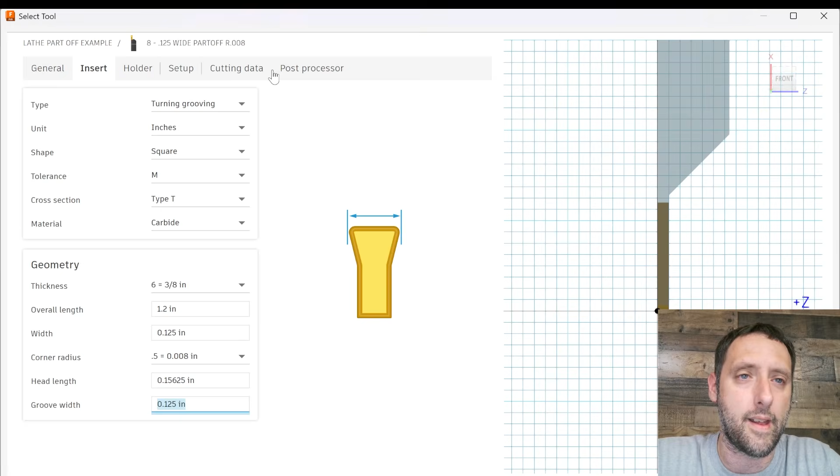My width, 0.125. Corner radius, type it in, 8 thousandths. Head length, not really too worried about that. My groove width, I'm going to make it match my width. I just find it easier, and I don't have to play around with settings. Setup, this should be fine right here. I'm going to leave everything default that I can. Surface footage, we'll go 350. Cutting feed rate, we go 2 thousandths. Post processor, tool number 8, whatever next tool it is. So I'm gonna hit select.

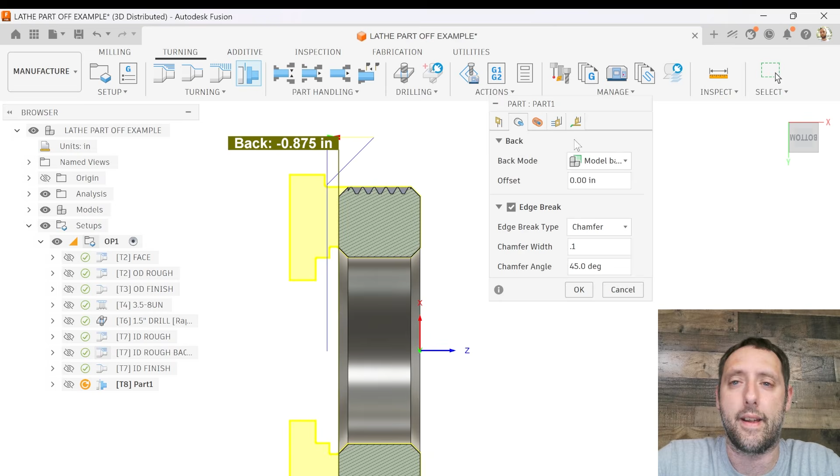I'm gonna go to my geometry tab. Back mode, model back. Offset, we're not gonna offset. Now edge break. This is what's gonna put the 45 degree on, right? So it's a 0.100 chamfer. So I'm gonna put 0.1 45 degree, okay? Then I'm gonna go to the radii tab. Now look at the 45 right now. You got this blue line going all the way across. If you leave it like that, it's gonna be cutting air. We don't really want that. So what I'm gonna do is my clearance right here. I'm gonna go to selection. Go to select this outer diameter right here. I want the red. And we'll go extra 50 thousandths.

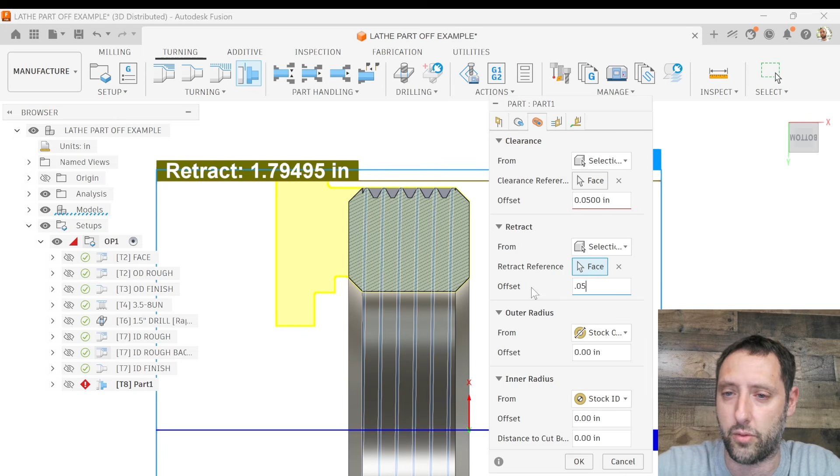Retract, I'm going to do the same thing. There's other ways to do this too, so it's kind of preference on how you handle this. Make it 50 thousandths as well. Outer radius, I'm going to put it on selection. Probably should just leave it there, but oh well. And my inner radius, I'm going to put it on selection. I'm going to select this ID, and we'll offset it. We'll go additional minus 0.1. All right. Everything else should be fine. We're going to leave it default. I'm going to hit OK. And we're going to name this toolpath part off.

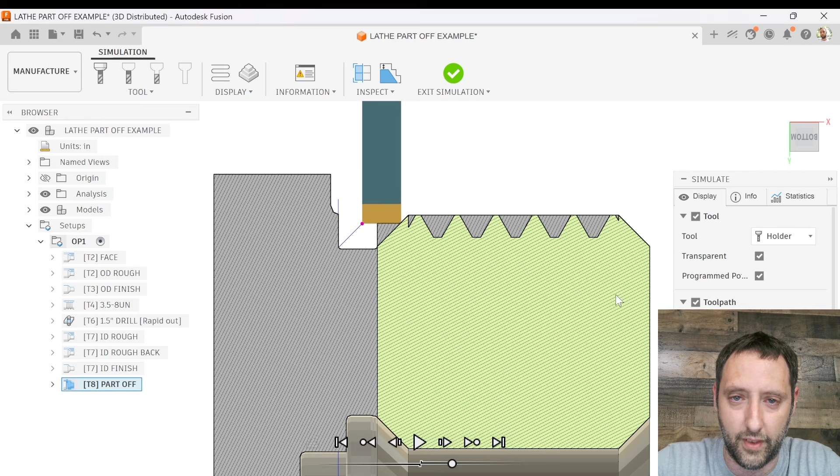And let's simulate it. So I'm going to simulate it. Tool comes down. Feeds in. And we're going to part it off.

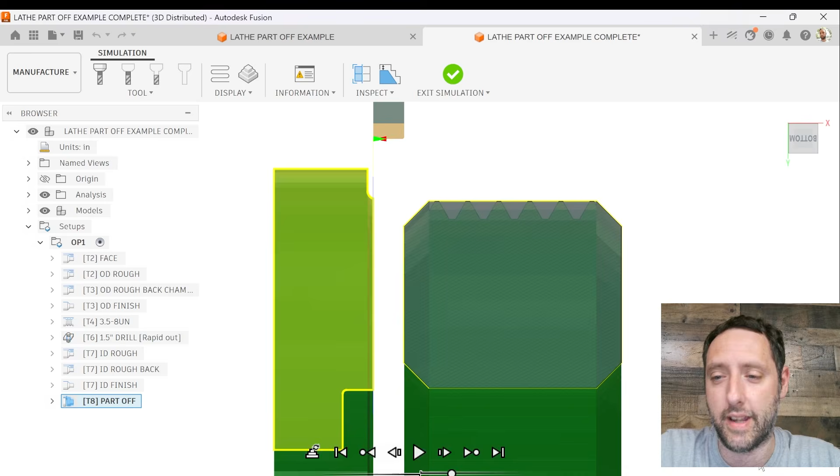Okay. And when I say a burr, yeah, it is going to prevent the two mating parts from screwing together. Okay. So now you can always sand that off, or use a file or emery cloth, but just do it the proper way. But that's about it, guys.